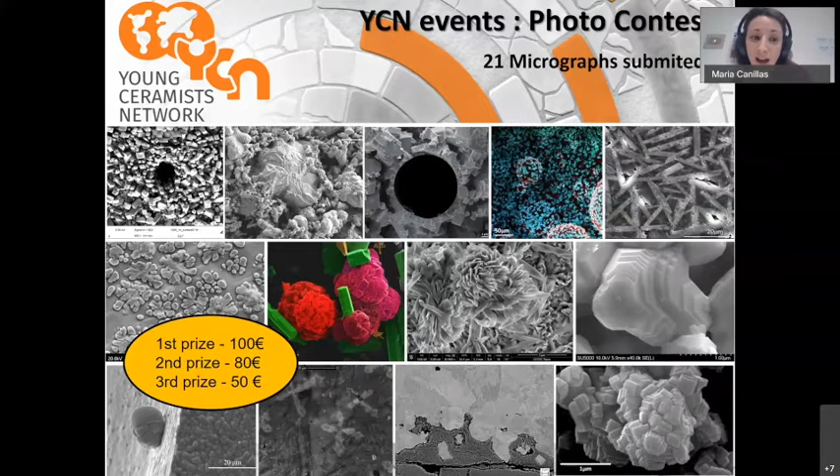Finally, another of the projects we are developing is the third photo contest. The deadline already finished in December. 21 micrographs have been submitted, and we will give a prize to the best micrograph.

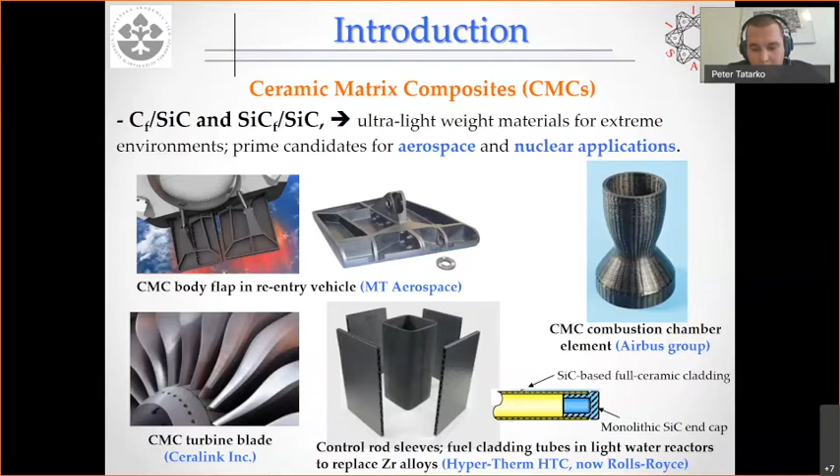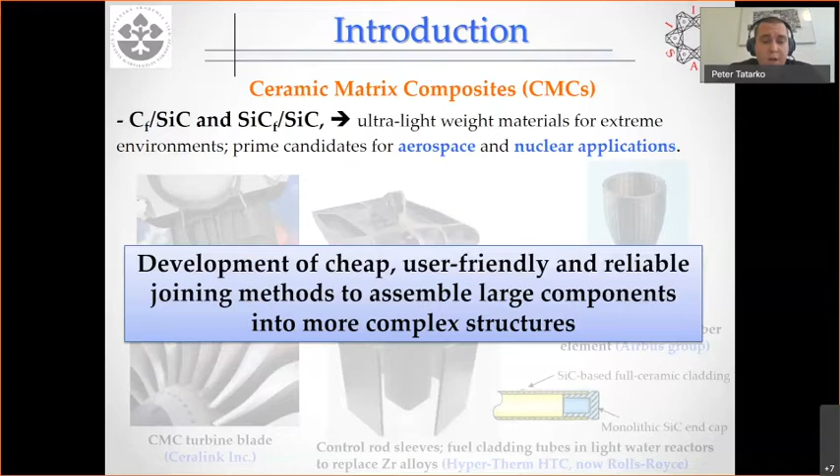But one issue still remains: to develop a cheap, user-friendly and reliable joining technique to combine all these large parts into such complex structures. Me and my co-authors, we tried our best to contribute to this field in the last couple of years.

We were also involved together in one European project called ADMACOM. It was the Factory of the Future project within FP7, and the coordinator of the project was Professor Monica Ferraris from Politecnico di Torino. You can see all the partners here, and I would like to point out that among others, we also had two industrial partners, MT Aerospace and Airbus Group Innovations.

Our aim of the project was to develop new joining technologies for aerospace components. The project defined several different approaches. Here you can see, for example, the brazing of alloys, or using transient liquid phase bonding, also electric current assisted processing. Then the other two were mainly focused on the processing and modification of surfaces before joining.

All these activities were focused on this, because here I'm showing you the same example as on the slide before, as these are great examples from one of our project partners, MT Aerospace. Here you can see the body flap. The idea of the whole project, and why we started working on this important field, was related to this.

This aerospace body flap, you can see here that they were using either mechanical joints, so here you can see several screws, or they were using in situ joining by CVI technique, because these materials were produced by chemical vapor infiltration, and they were using in situ joining technique. Our aim was to come up with some alternatives to suggest new joining techniques for the industrial partner. Apart from that, this is in the board, you can see.

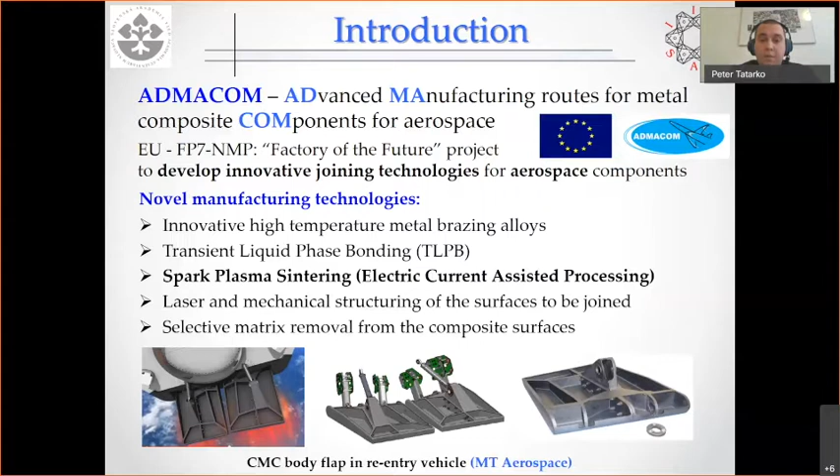My main topic I decided for today's seminar is going to be on spark plasma sintering joining, or if you want, electric current assisted processing. We had to start on this in a small scale, of course.

Here is one example of the materials which was supplied by MT Aerospace. One important feature I would like to point out here: these materials are always covered by CVD silicon carbide layer. So here you can see the top view, this is the backscatter image, and you can see the side. You can see a very uniform light gray phase, which is CVD silicon carbide.

Just to see the difference, here you can see the uncoated materials, and you can see this light gray phase is the silicon carbide from the matrix, but you cannot see such a uniform layer of the CVD silicon carbide. The reason why they were using this material is just because of having better oxidation protection.

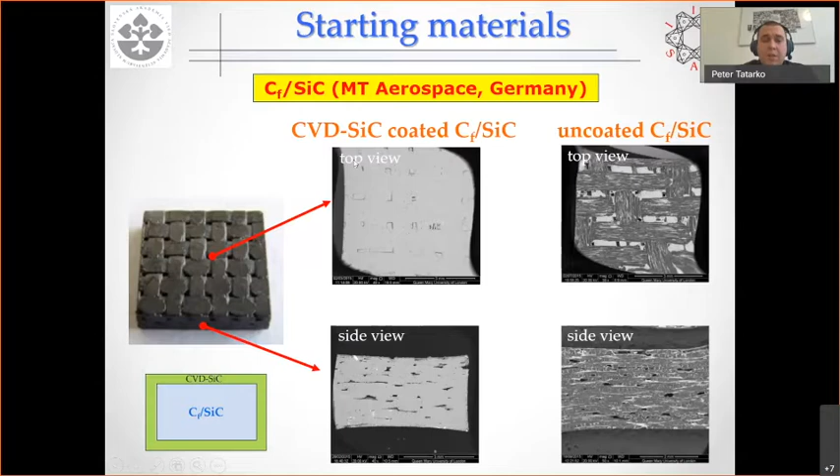Because these materials are always covered by CVD silicon carbide, instead of our aim being to join carbon fiber reinforced silicon carbide directly, we started optimizing our joining process using the monolithic beta silicon carbide produced by CVD, because at the end it's the same interface which comes into contact when you want to make a joint.

There were some requirements we needed to consider before developing a new joining process: we needed to use temperature and time as low as possible. We preferred solid state diffusion bonding. We didn't want to have any liquid phase formation during the joining because we wanted to avoid shrinkage of the filler, to not produce residual stresses in the joint.

And of course, we didn't want any strong reaction between the filler and the matrix, and no decomposition of the filler. These five points were very important for us because at the end we wanted to avoid any damage to fibers or protective coating on CMCs.

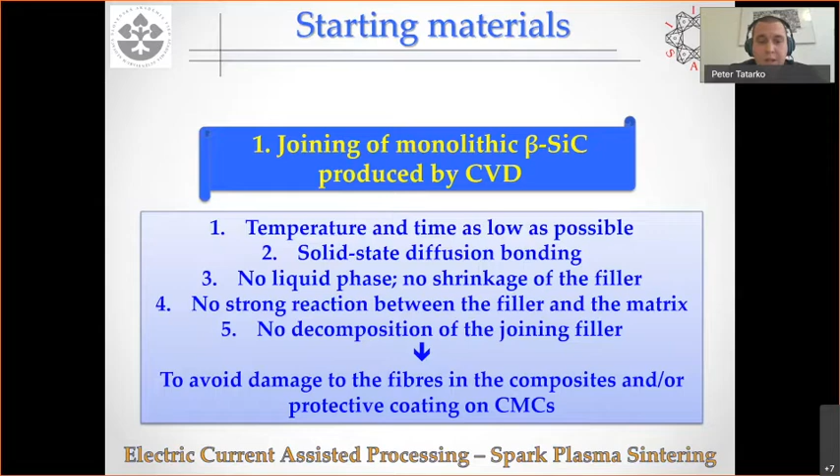And for this process, we use electric current assisted processes, spark plasma sintering. This is my main topic for today's webinar.

So we use a standard SPS spark plasma sintering machine, which you can see here. For those who don't know, this machine works because you have 2 graphite punches, which are connected to electrodes, and they are connected to a pulse DC power supply. In case you have an insulating sample, electric current goes through the graphite die and graphite punch, and then heats up the sample indirectly. In case you have a conductive sample, then you have a combination of both direct heating and indirect heating.

For today's presentation, I will call this process SPS joining. But you can also skip using the graphite die, and then you only use 2 punches, so there's no die, and the current has no other option but to flow through the sample. This sample needs to be conductive, and for this kind of technique I will be calling it flash SPS joining.

So I can say that my presentation today will consist of 2 parts: one on SPS joining, and one on flash SPS joining. So let me start with the first one.

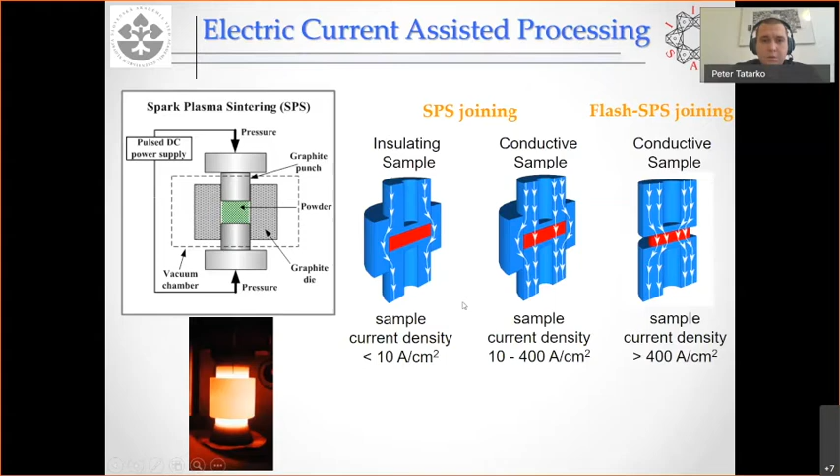Okay, so as I said, it all started with CVD silicon carbide. So basically here you can see what we had. We've got pure CVD silicon carbide material, 2 blocks, and it was quite simple. We put 1 block on another, we put in the graphite dies, and then we put it in the SPS, and we applied temperature and a little bit of pressure, and we got a joint.

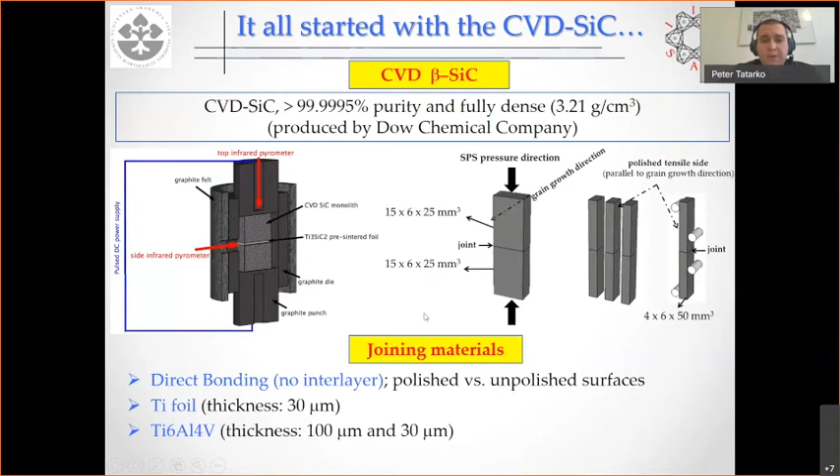As the joining materials, in the first case we call it direct bonding, meaning we didn't use any interlayer. So there was nothing in between. We only compared 2 surfaces, where in one case the surface of CVD silicon carbide was polished, and in the other case it was unpolished. Then we just compared the effect of surface roughness on the joining.

In the other two cases, we used titanium-based foils, pure titanium and titanium-aluminum-vanadium. We inserted this foil in between the two parts of silicon carbide and used it as an interlayer. In the last case, we also used the MAX phase, but it all has some reason which I want to explain and convince you it was a good option to go to.

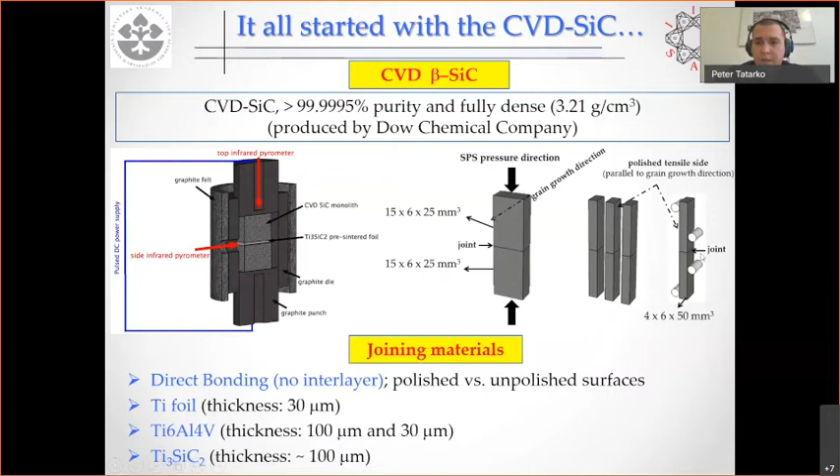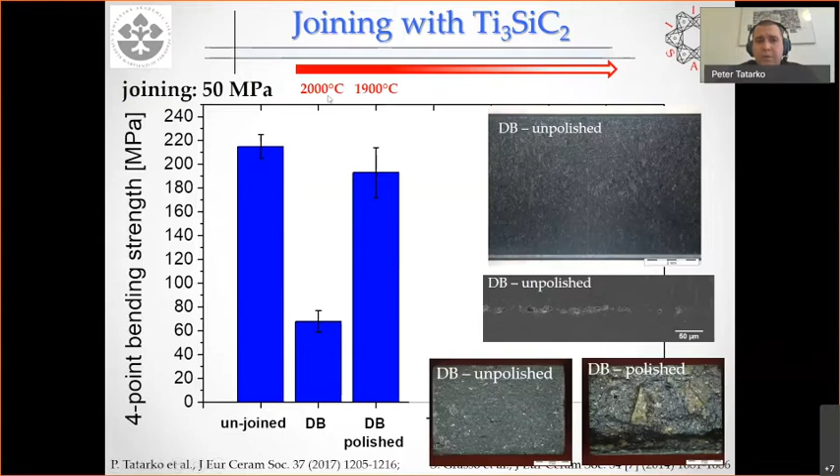So the problem was the temperature. These processes require very, very high temperatures. So we wanted to reduce the temperature, and we used titanium and titanium-aluminum-vanadium foils. We could lower the temperature to 1700 for titanium, or 1650 for titanium-aluminum-vanadium. Especially for the titanium-aluminum-vanadium, we got very nice strength which reached the reference unjoined material.

These results were very positive, and we were very happy about that. Unfortunately, when we looked at the cross sections of these joints, there were two important issues we found.

The first was a significant shrinkage of the filler. Here you can see we used a titanium interlayer with a thickness of 30 micrometers, and we ended up with an interlayer about 15 microns. In this case, aluminum vanadium, we also used 100 micrometers, and especially for the first case you see almost 50% shrinkage. This was very dangerous because it can produce high residual stresses in your material, and that explains a lower strength than in the case of the 30 micrometer foil.

The second important issue I would like to point out is that the alloy was very reactive. You can see these nail-like structures. This can damage either the carbon fibers in the composite or the protective silicon carbide layer. So that's why we needed something else.

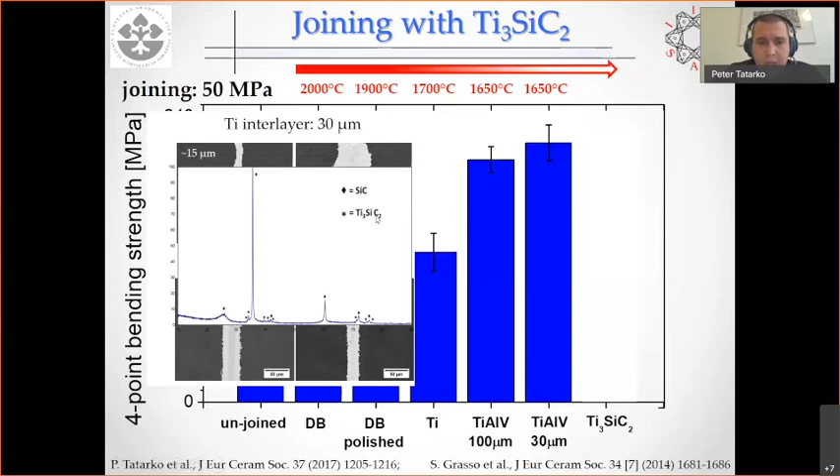One important point: when we did the XRD after the joining, we found, of course, silicon carbide from the matrix, but we also found titanium silicon carbide, the so-called MAX phase. In other words, this joining interlayer was formed by MAX phase titanium silicon carbide. So the question was, why use titanium at 1700 degrees and then end up with a MAX phase, if you can use MAX phase directly as the joining filler? That was our motivation to use MAX phase as the joining filler.

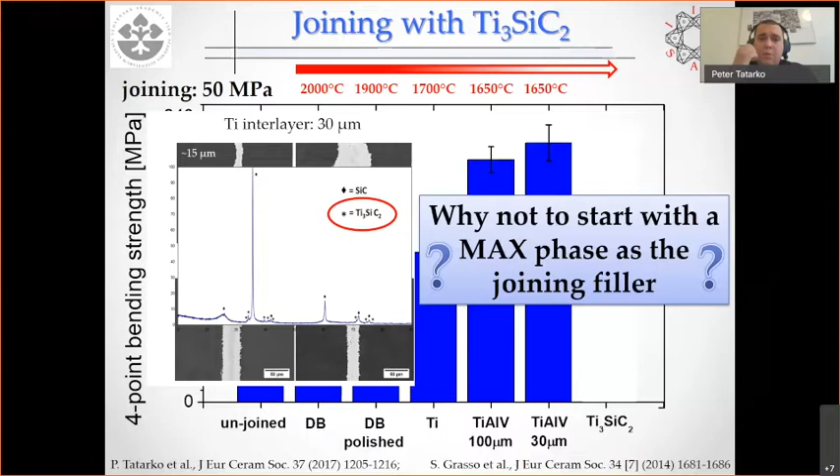So very briefly, we synthesized this MAX phase powder using microwave sintering, and you can see there are very typical impurities for these materials: titanium carbide and titanium silicides. We intentionally added some alumina because alumina helps with sintering of this material and also helps with oxidation protection. This powder was then sintered by SPS at 1300 degrees.

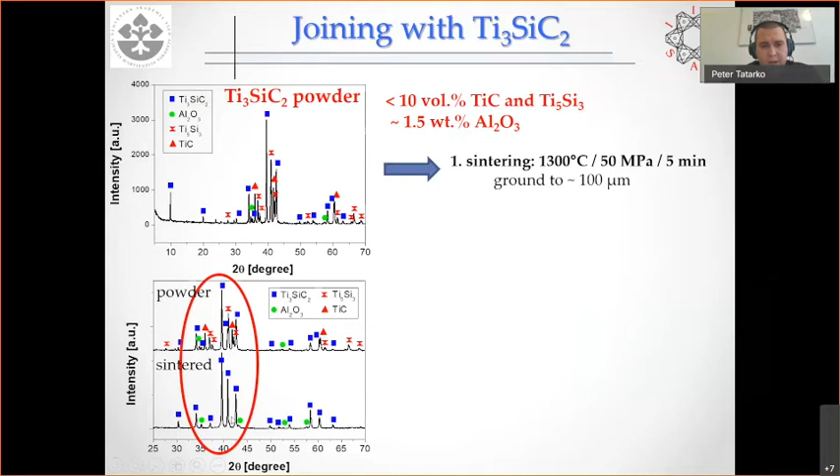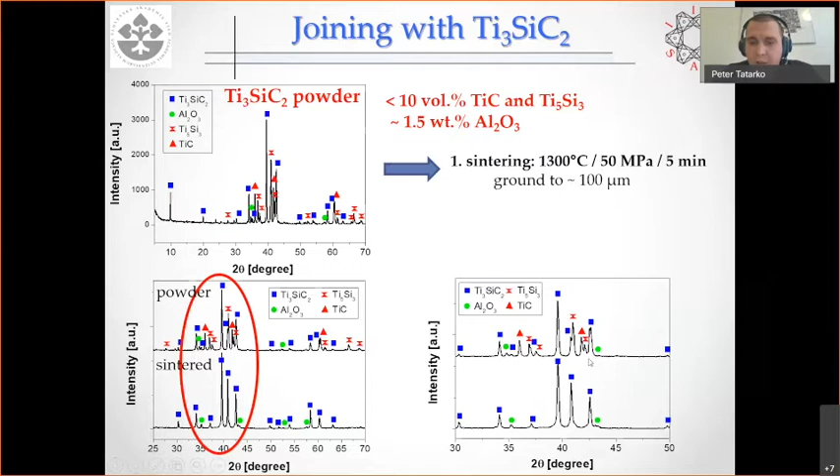What happened was very interesting. You can see here this is the initial powder, and this is after SPS sintering. This graph is a zoomed-in view. After SPS sintering, all these impurity peaks vanished. We didn't see any titanium carbide or titanium silicides anymore.

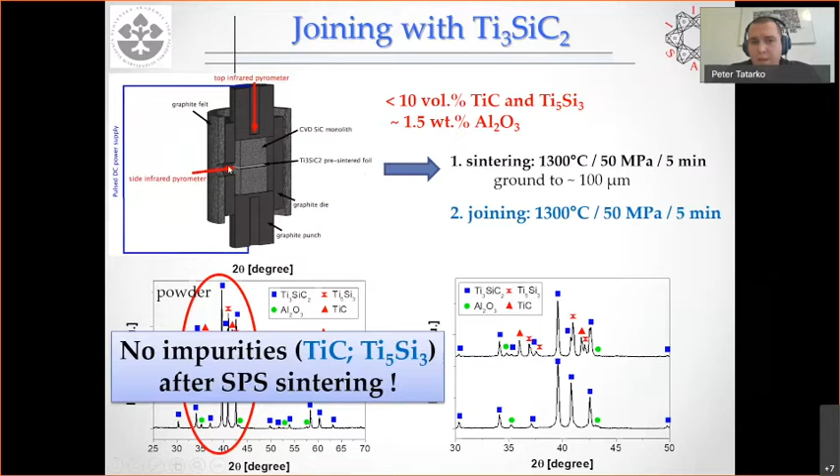This was very important for us because, in other words, for joining we used pure MAX phase, of course with some alumina, but as I explained before, we wanted the alumina to be there. Then we ground this material to around 100 micrometers, and inserted this foil between two silicon carbide pieces, and then used SPS at the same temperature at which we synthesized and sintered this material.

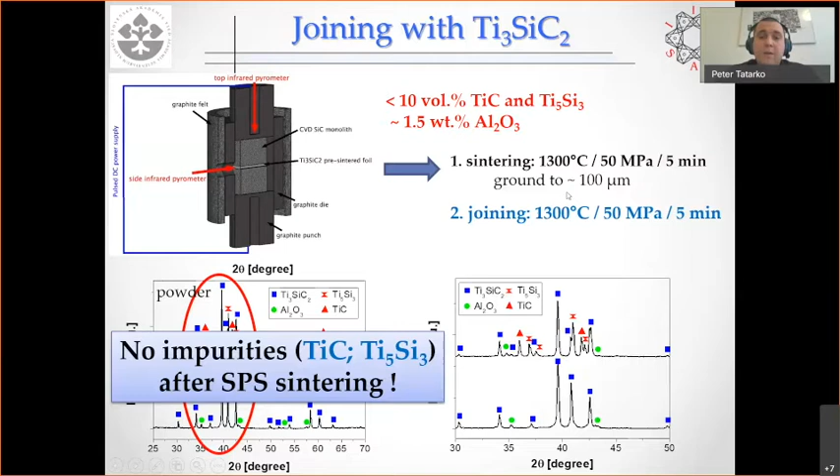First, very clear and very nice results were seen when we looked at the cross section of this joint. You can see in this case we didn't have any shrinkage. None at all. If you remember this nail-like structure, here there is nothing. So the interface was very clear, very smooth, and very nice. We were happy about that.

If we zoomed in, we only found the alumina particles which we wanted to be there, and the remaining material was just the titanium silicon carbide. So from how the joint looked on the inside, the SEM, we were quite happy with that.

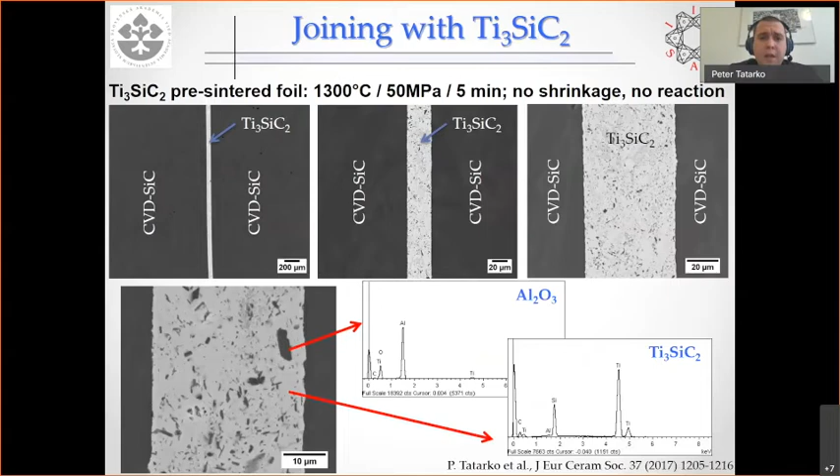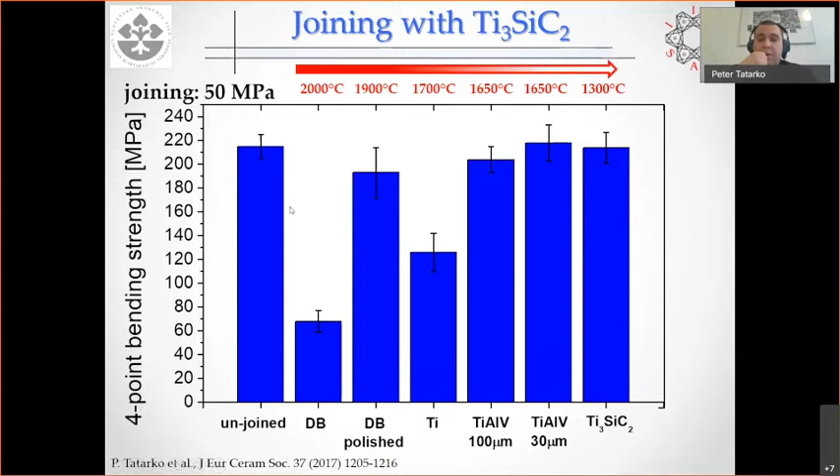Then let's have a look at how the joint mechanically performed. You can see here that with the titanium silicon carbide, we got almost the same strength again as we obtained for unjoined material. The important thing is that we started from 2000 degrees C and lowered the temperature down to 1300 degrees C, which is a significant reduction. In other words, we only used 1300 degrees C, but we retained the same strength of the materials, which is a very important feature.

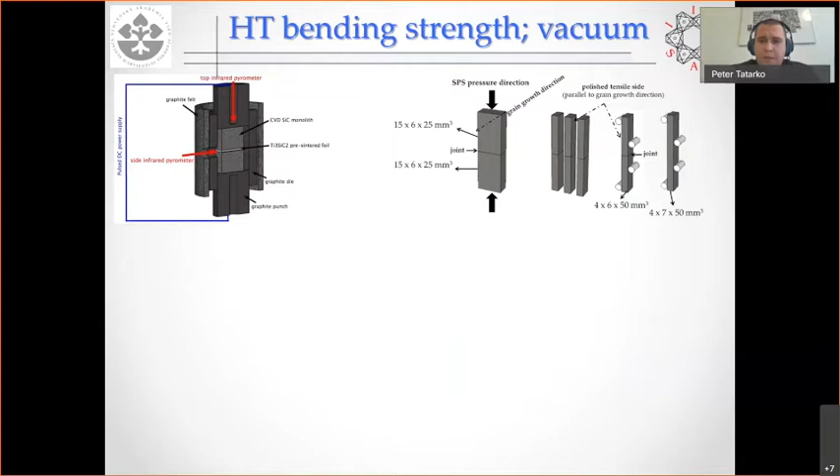That's why we also wanted to see how these joints performed, because as I mentioned at the beginning, these joints were supposed to perform at higher temperature in an extreme environment. So we needed to know how these joints would perform at high temperature. We did the same preparation of the beams, and then used high temperature bending strength testing in vacuum.

This red line shows the reference strength measured at room temperature, and then you see 1000, 1100, 1200, and so on. You can see that at 1000, temperature up to that point had no effect on the strength of the joint. Then the strength continuously and linearly decreased with increasing temperature.

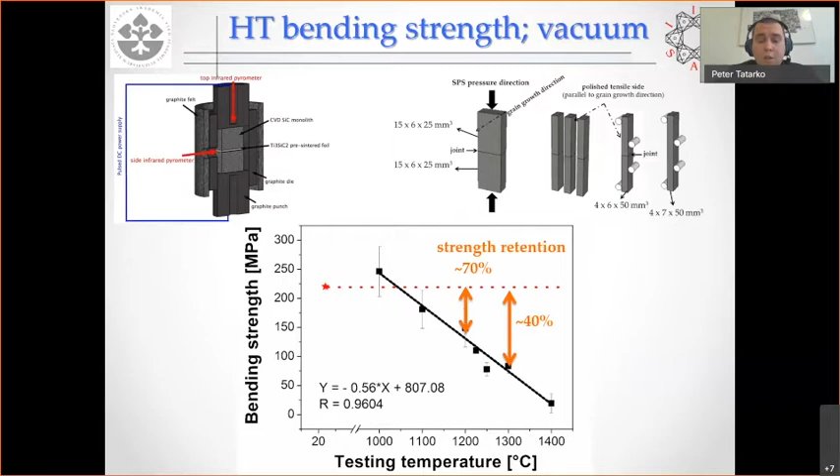The important fact is that from our industrial project partner, MT Aerospace, we knew that the critical temperature for them was 1200. You see that even at 1200, the strength retention was around 70%, which was quite okay. And we still had some room to improve, because even at 1300, it was still around 40% of the strength of the initial joint. So it was quite good results, and we were quite happy with that.

If you look briefly at a few images of fracture surfaces, you can see at room temperature the sample failed outside the joining area. Here you see the joining interlayer. With increasing temperature, here at 1000, 1100, 1400, the interface or the filler played a more important role, and especially at very high temperature, the filler was the weakest part of the joint.

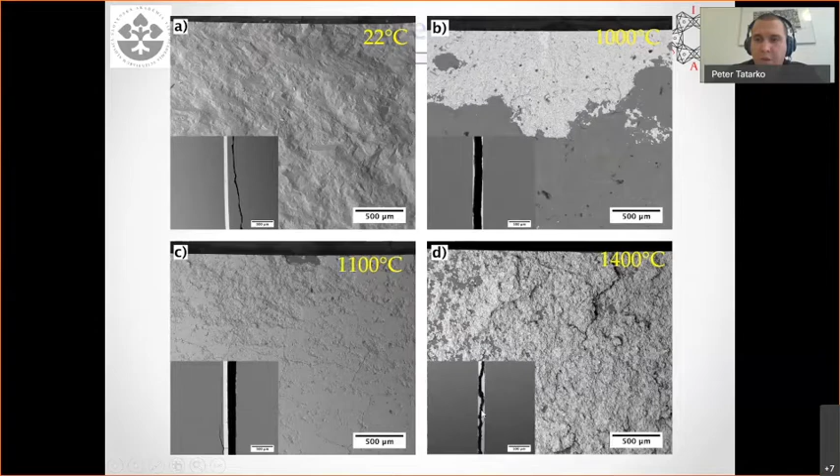A very important fact was that because the tests were done in vacuum, we didn't find any decomposition of the MAX phase, because we didn't see any titanium carbide or silicides or other impurities. At 1400, the pattern looked exactly the same as at the as-joined sample, which was very good. If you look at these images, you can only see typical damage at high temperature, like microcavitation and microcracking. So those were the typical reasons for the sample failing, not the composition of the filler.

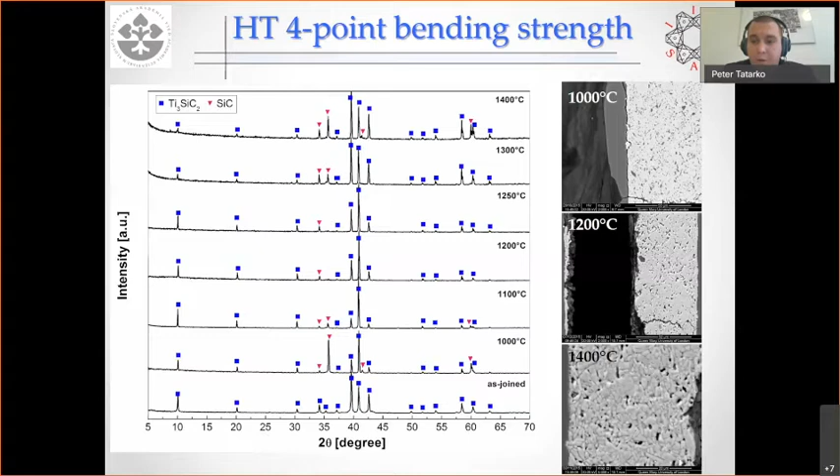So all of this made us believe that this material is promising to be used for carbon fiber reinforced silicon carbide. Now coming to the composite, which was our main priority.

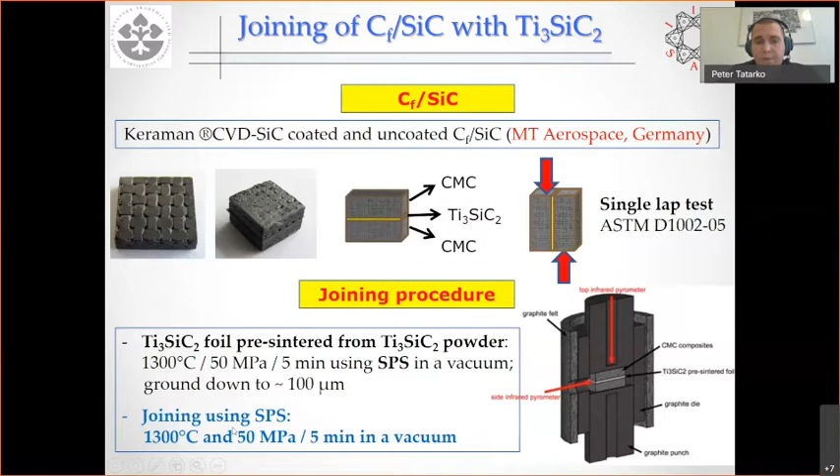Here, as I mentioned, we got some samples from MT Aerospace from Germany, and then we used a very similar process as I described before. In this case, we used carbon fiber reinforced silicon carbide, and used the same temperature and all the same parameters as before.

I would like to remind you that we have two types of material. One was coated, fully coated from all sides by a CVD silicon carbide layer, as I explained before. And here you see the uncoated sample.

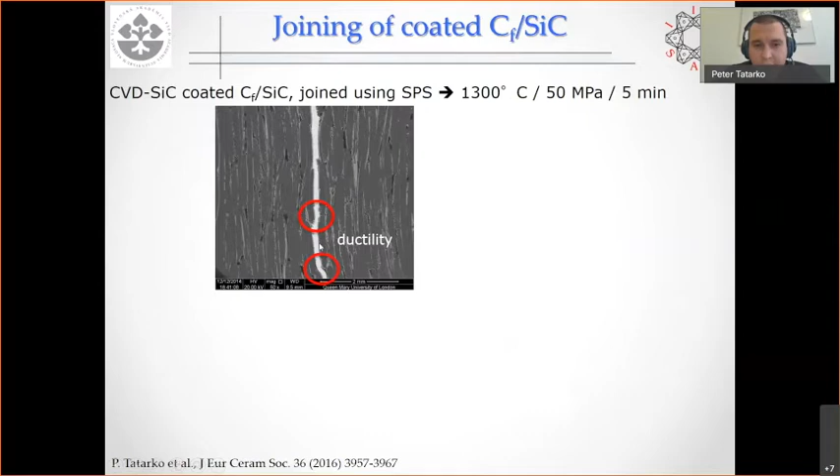So coming to the results, here is the cross section for the coated sample. First thing we noticed was that the foil, the interlayer, was really ductile, because you can see it conformed very well to the rough surface of the CMC. Another important thing: here you see the CVD silicon carbide coating, and this coating always has some cracks because of the thermal mismatch between the coating and the matrix.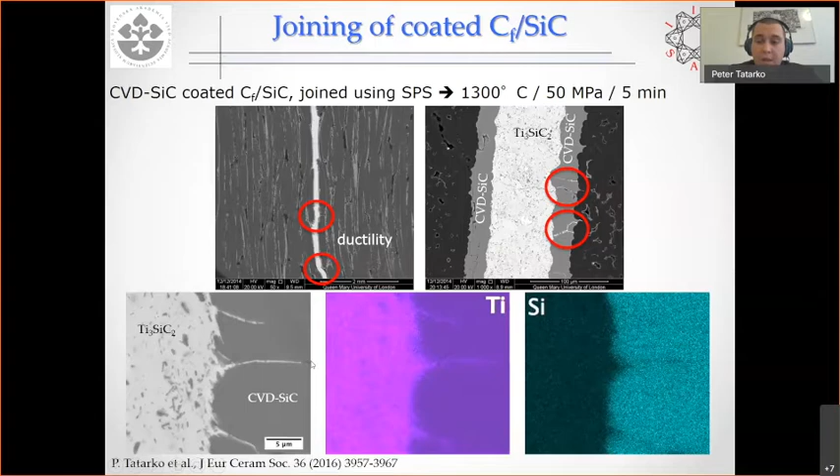In our case, after joining, we actually filled up these cracks with our filler — in other words, we healed these cracks. You can see here the EDX mapping: it's depleted in silicon but enriched in titanium, clearly showing that it's our joining filler that came in and healed the crack. This showed, at the end, a very promising and good result for strength and mechanical performance.

Now coming to the result for uncoated samples. In this case, we have not just one interface, but two interfaces: one between the silicon carbide matrix and our joining filler, and the other between carbon fibers and the joining filler. Especially in the case of the interface between silicon carbide and the filler, it was exactly the same situation as before.

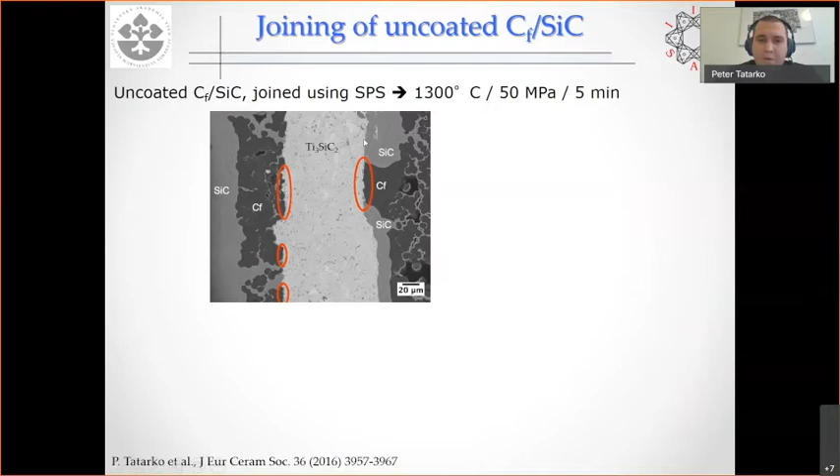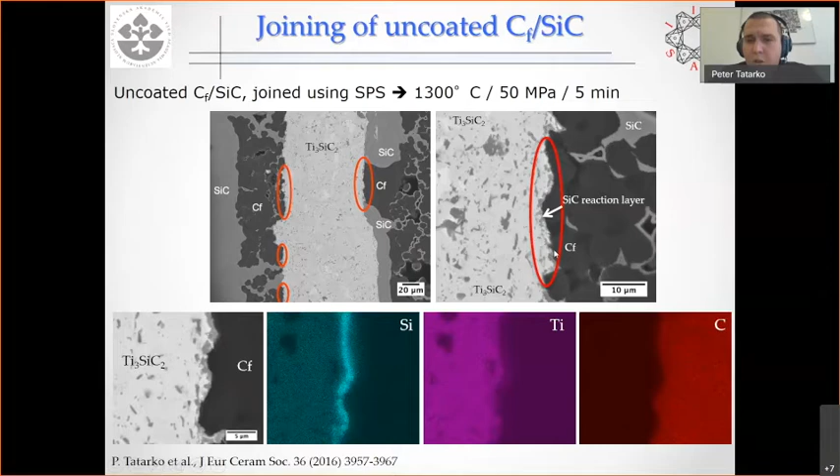But in the case of the carbon fibers, we were of course worried about not damaging them. You can see here in the SEM images and EDX analysis that the filler reacted with carbon from the fibers and actually formed an in-situ silicon carbide reaction layer. Once this layer is formed, it stops further diffusion, so you don't get damage to the carbon fibers.

Coming to the mechanical performance of these joints, here are the values, between 25 and 35 — this was the value we got from the supplier, MT Aerospace, as a reference sample. You can see that when we used coated samples, the strength of the joint — this is apparent shear strength, I should say — for these coated samples, we got strength just within the interval of the reference sample.

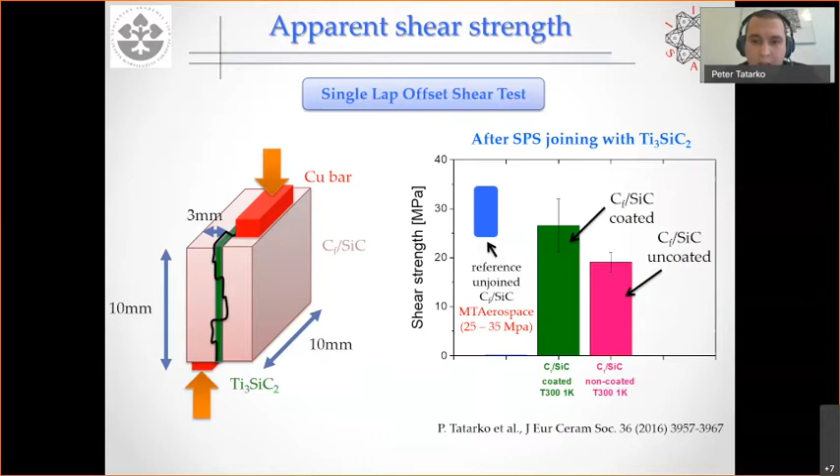In case of uncoated, the strength was a little bit lower, and we believe we got this higher strength in the other case just because this filler was better integrated with the matrix, because it filled up the cracks and healed them. So the filler was better integrated with the matrix.

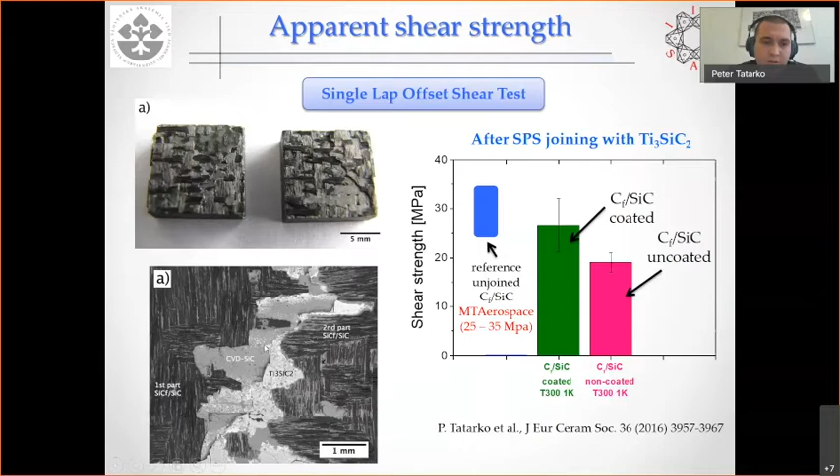If you look at the fracture surface, you can see delamination, but the crack went from one part of the composite into the second one. This suggests that the joint was very strong, stronger than the interlaminar shear strength of the material.

That's why we wanted to go further and understand the effect of electric current on joining performance. So that's the second part of my talk, where I'd like to explain how we developed this. What we did was quite simple - we put the sample, we wrapped the sample.

We wrap up the sample in the graphite felt. Here is our sample, CVD silicon carbide coated carbon fiber reinforced silicon carbide, and we wrap it up within the graphite felt. Then we put it between two graphite punches in the SPS machine. Then we applied a little bit of pressure, and we applied the current.

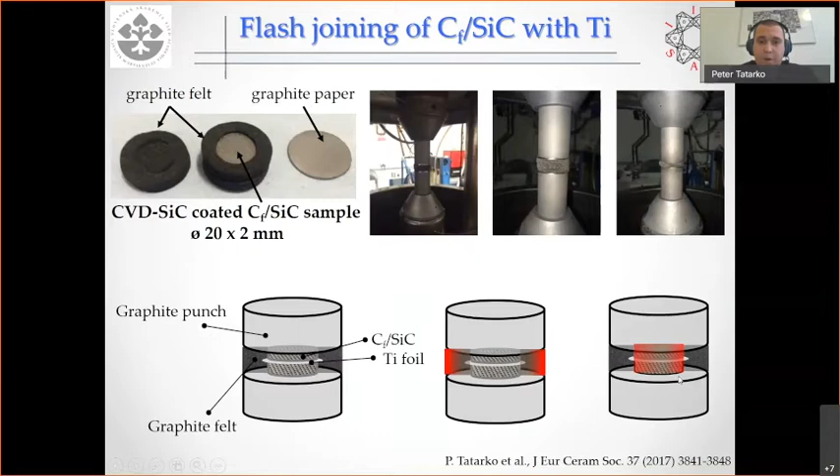So why did we use this felt? We were relying on the fact that at the beginning of the process, graphite felt has lower resistance than our samples. So the graphite felt will heat up first, then preheat our sample, and then the resistance of the sample drops, and the current goes through the sample and we can obtain the joint. That was our hypothesis, that was the idea, and we tried to explore it - I'd like to show you how we did that.

In our SPS machine, we could only control the power by setting the power limit. So what we did was set the power limit to 80%, and we interrupted the process after different times - here 22 seconds, 19 and 12 seconds. Of course, the lower the time, the lower the heating power, and the lower the current.

In all three cases, we obtained joints. After joining, the material could be cut, polished, and looked at by SEM. But the problem was, if you see here - this is for sample number 1, 2, and 3 - you see the power is decreasing. You can see very clearly that the power was so high that we actually decomposed the CVD silicon carbide matrix and the coating - you see all these holes.

Also in this case, it was decomposition of the silicon carbide. In other words, the power was really too high - the temperature inside was extremely high. But we also saw that with decreasing power, here is the lowest power, and you can see the decomposition is less significant than in the other case. So we could see a clear effect of the heating power.

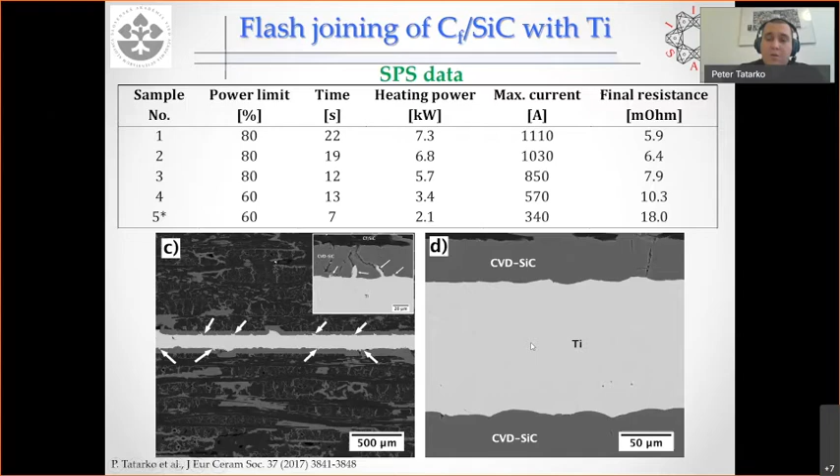So our results showed that it works. You just need to stop or interrupt the process right at the right time. So if you interrupt your process once the resistance drops and reaches the plateau, then it's just the right time to interrupt the process. So it was all fine.

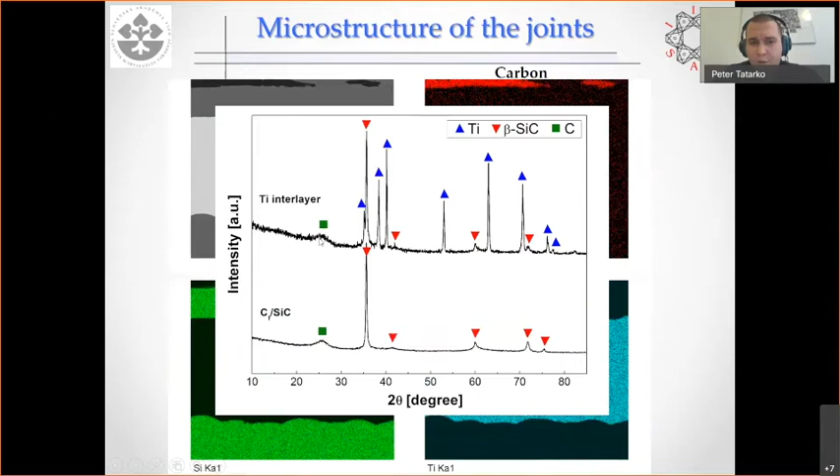We wanted to see what is the chemical composition of the joint, but you can see clearly there is only titanium. You don't see any silicon or carbon diffused into the layer. Truth be said, we also did EDX by TEM, because this is on SEM. We did also by TEM, and we found some very little concentration of silicon and carbon in the titanium, but basically the concentration of these two elements was not really enough to produce some phases, as will happen later, which I'll show you. This was also confirmed by XRD results. You see only titanium, these blue triangles, only titanium we found.

So coming to the most important thing, of course we wanted to understand the temperature, because we knew the power, we knew we got a nice joint, but everyone asked what is the temperature in there. So we inserted the thermocouple just right at the joining interface, you see here, and then we put it in the SPS as before. And you can clearly see here that the temperature, the maximum temperature we measured was below 1250. So it's much lower. The melting point of titanium is around 1670. So this is really below melting point. So the titanium could not melt, and the temperature was so low that it did not allow any diffusion of silicon or carbon into the titanium.

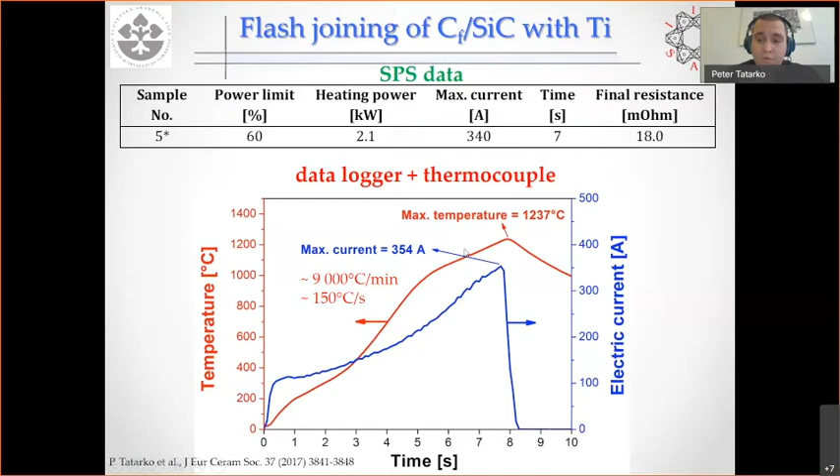You can see extremely high heating rate. It's 9,000 degrees C per minute, or if you want, it's 150 degrees C per second. So it's an extremely fast process, and that's why diffusion of these two elements was delayed or hindered.

Okay, I can skip that. So after joining, of course, after understanding what is the temperature in there, what do you have in the joining area, you always need to know the strength, the mechanical performance of the joint.

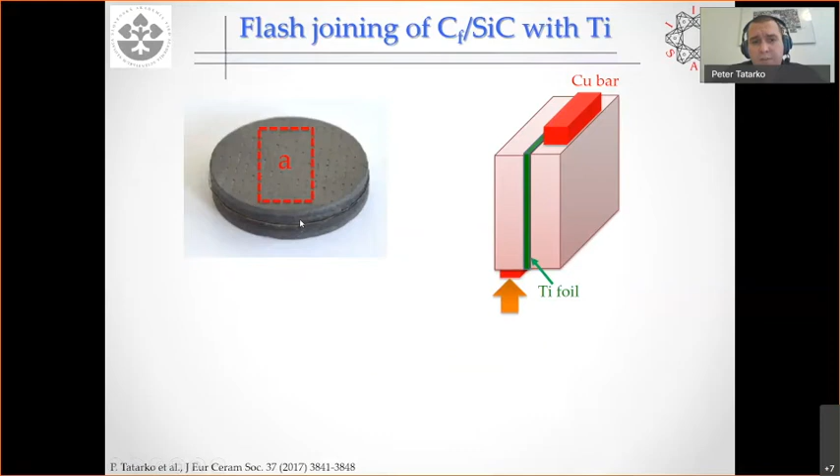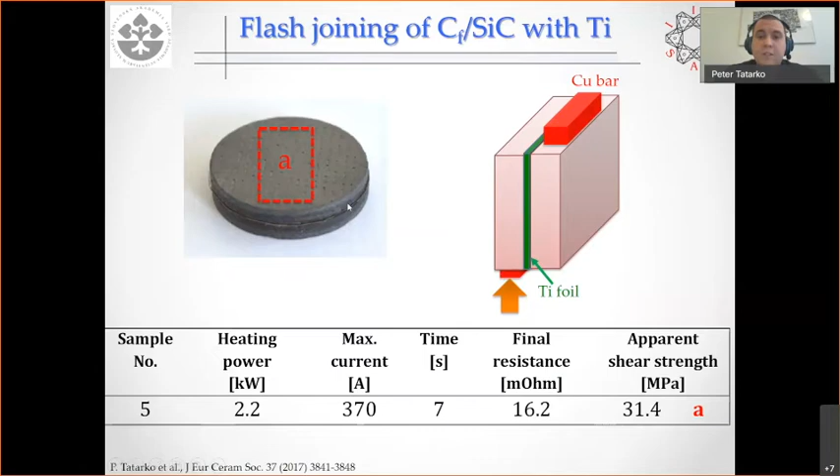So we cut the sample right from the middle of the sample, and here you can see that we got apparent shear strength about 31.4 megapascal, which is an extremely high value, and we reached the value of the reference unjoined material. I will show very soon the comparison with the other process.

Here is just an example of the fracture surfaces. You can see, I would like to point out the conformal behavior of titanium. This layer, which was of course peeled off at some places, but you can see how it nicely conformed to the rough surface of the CMCs. So these are very nice results as well, and that's the reason it conformed very well. It got nice integration with the matrix. That's why we could get such a nice high apparent shear strength.

So as a last part, of course, is the comparison with the standard SPS joining, because here we didn't use the graphite die, we set up a new process, we were playing with the heating power, extremely short period. So we wanted to compare with the standard SPS process. We did the same thing, but this time we used again the graphite die. You can see we used the same temperature as we measured here, about 1250. We used no holding time, as it was for the flash process, and we used also rapid cooling as for the flash process. The only difference was the heating rate, because here it's 100 degrees C a minute, which is standard heating rate for the standard SPS process.

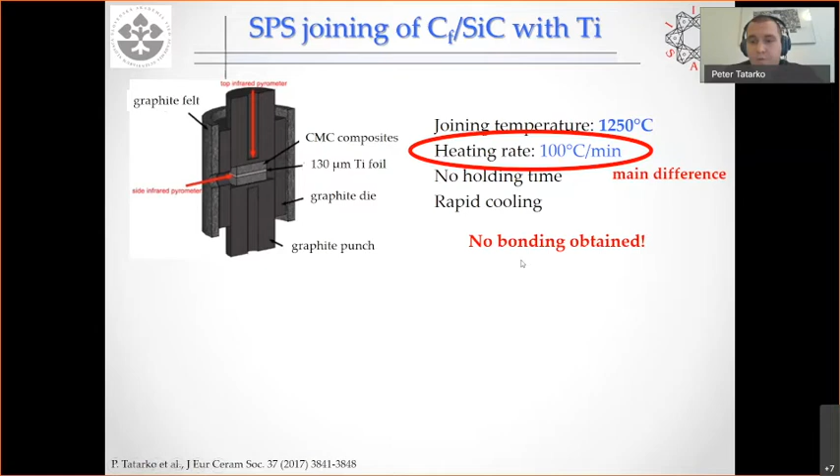If you remember, for flash SPS it was 9,000 degrees C a minute. So significant difference. At the end, when we applied this kind of process, we didn't obtain any joint. This is just the cross section of the delaminated foil. So basically what happened, we tried to join, and after joining the CMCs fell apart, and only we got this delaminated titanium foil.

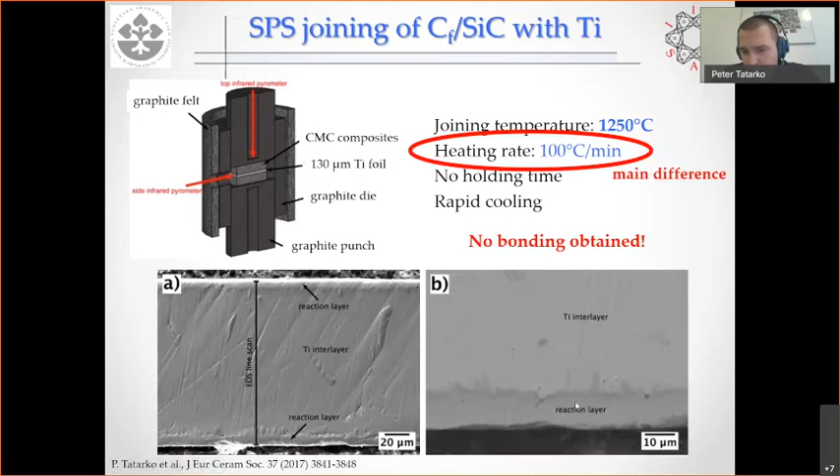But we could still polish it. The polishing is not perfect, but it doesn't matter, it shows what I want to see. What I want to show you is the reaction layer. If we did EDX, you can see this is titanium, and here you see silicon and carbon.

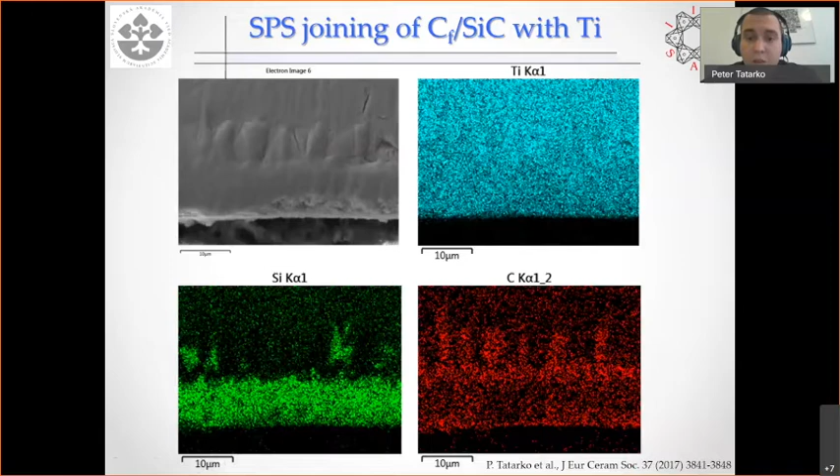So also by XRD and EDX mapping on TM, we confirmed that there was titanium carbide forming, and titanium silicide. If you remember, for the flash joint process, the interface was clear, no diffusion, or let's call it minimal diffusion, not enough to form additional phases.

So if we wanted to get a similar joint using the standard SPS process, we had to increase the temperature to 1700, apply some dwell time, and apply a cooling rate of 100 degrees C a minute. When we modified the standard SPS process, in that case we got a joint, so you see no delamination, and we could test this joint.

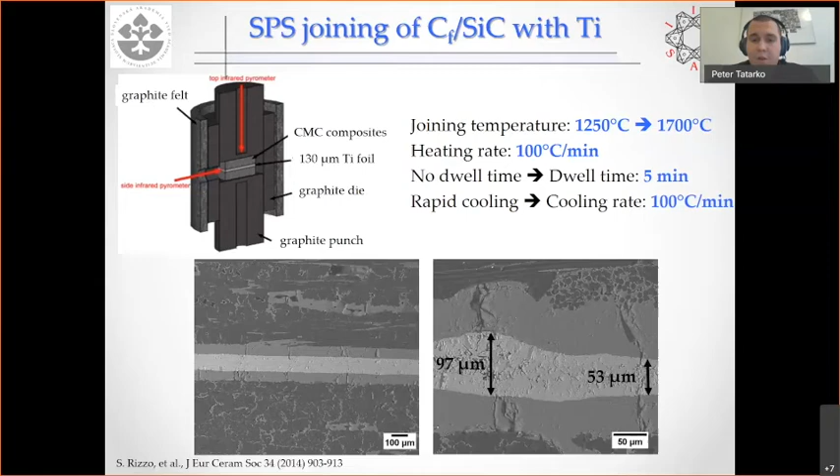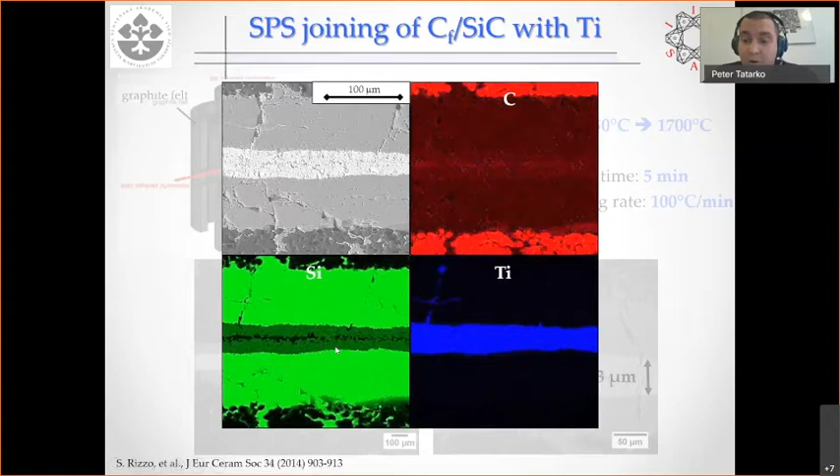But if you look at the EDX mapping, you can see again in the middle part of the joint it's titanium carbide, carbon concentrated right in the middle. Then you see silicon here, so titanium and silicon, so it's titanium silicide. So as I showed before, it's not pure titanium as it was in the case of the flash joining process.

Here is one summary, and you see this is a reference unjoined sample. If you remember, I said during my presentation that the value is between 25 and 35, this is reference from the supplier. But if you use flash joining, only 7 seconds, we got an interlayer, metal-to-metal kind of bonding, and we got titanium within only 7 seconds, and the strength is right in this interval.

On the other hand, when we use standard SPS joining process, it took around 45 minutes, and at the interlayer we got the max phase silicide, and also titanium carbide. So you see the clear difference, and the strength of the joint was much lower.

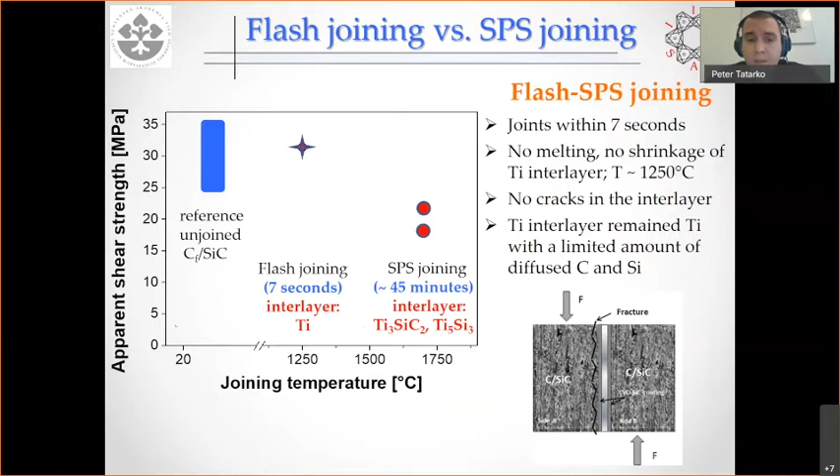So I believe I've convinced you that this flash joining is a very interesting technique, and of course it requires further development, but we are still trying to improve, especially the reliability of the process. So here is just a summary.

I would like just a few points. I would like you to remember that in case of joining monolithic CVD silicon carbide, direct bonding is possible. You don't need to use any metal interlayer, but you need really high temperature and pressure, and also a polished surface.

In case you use titanium, so a metal-based alloy, then you can do it at 1700 or 1650, but you will have significant shrinkage and interaction with the matrix. If you use max phase, in terms of the pre-sintered foil, you have no shrinkage, no reaction, and you can join at a temperature as low as 1300.

In case of the composite, I would like to point out the ductility of the max phase, which can conform very well because the surface of the composite is very rough, so the foil can really conform well, and you get a nice strength. In terms of flash joining, with very rapid heating and the whole process only 7 seconds, you get a very nice joint.

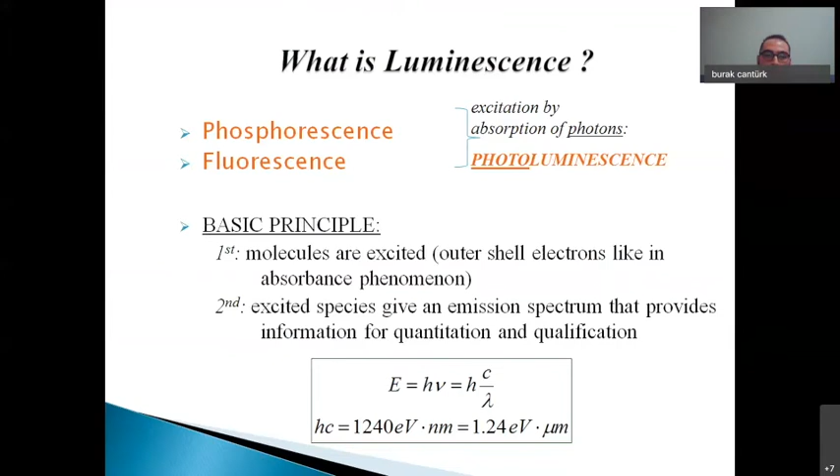Photoluminescence is a process in which a molecule absorbs a photon in the visible region, exciting one of its electrons to a higher electronic state, then radiates a photon when the electron returns to that lower energy state. In order to do that, we need an unfilled electron shell structure, which is why rare earth ions are suitable for this process.

Up conversion is the conversion of low energy photons to high energy emissions. It's the process where two or more low energy, longer wavelength photons are converted into one high energy photon at a shorter wavelength, which is visible in the visible regions.

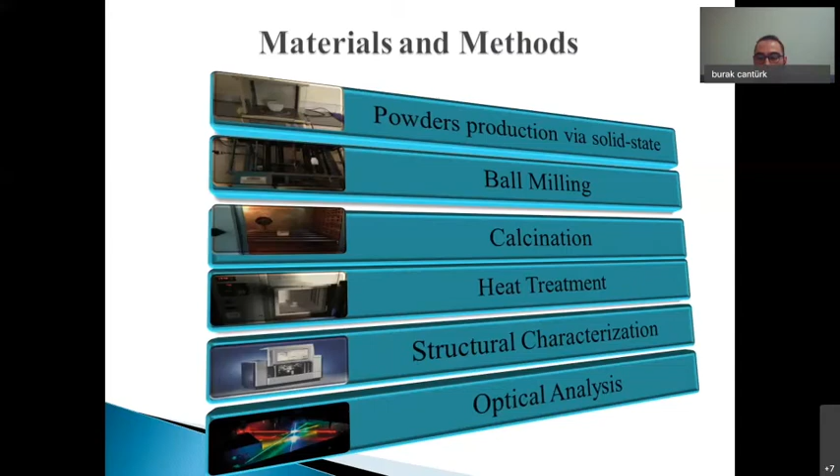Well, after some introduction, let's proceed with the materials and methods section.

We carried out the preparation stage as follows. We used lanthanum and titanium oxide as the starting materials, with rare earth ions such as ytterbium, erbium, and thulium doped with the appropriate stoichiometry in the site of lanthanum. We succeeded in producing this using the conventional basic solid state method.

First, the doped powders were mixed, and then a ball milling process was carried out, followed by calcination at around 200 Celsius and sintering at 1350 Celsius applied to the powders for over 20 hours to get the structure.

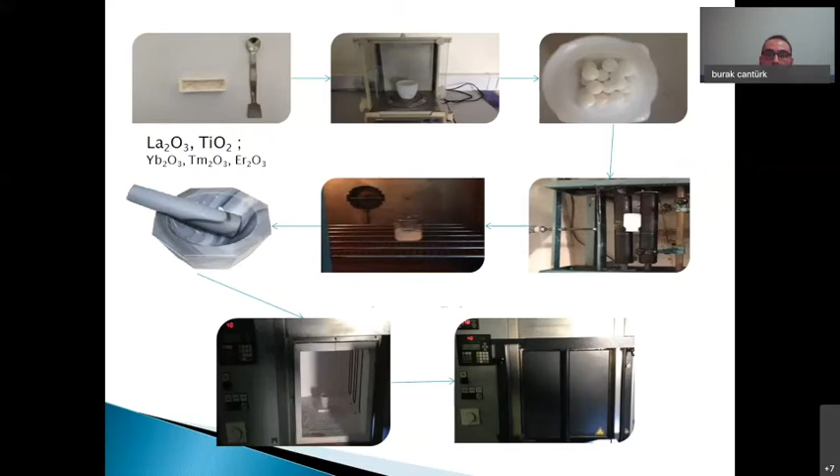Optical measurements of the prepared powders were made after the characterization analysis such as XRD and SEM. So let's take a look at some of our results.

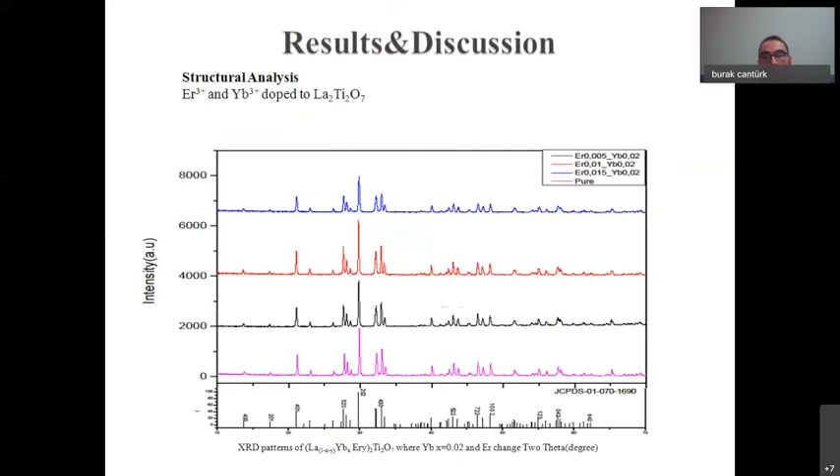In the compound lanthanum titanate, due to the ionic radius being close to each other, ytterbium and erbium co-activate inside the lanthanum site. We also measured undoped phosphors and showed them in the XRD diffraction to compare with the doped substances. As we can see from the graphs, all product samples display a single-phase orthorhombic structure without signs of impurities, with fitting that corresponds well with the reference cards, and no extra peaks were noticed. This points out that the ytterbium and erbium doping does not result in any second phase formation and fully dissolves in the lattice as a substitutional solid solution.

But the most significant observation is that a detailed examination of the peaks reveals slight shifts in the peak position to each side, left and right, with increasing doping concentration. These shifts were noticed during the calculation of lattice parameters and the volume of the unit cell, as we can see from the tables and figures.

In comparison with the undoped sample, co-doped phosphors showed a bigger unit cell volume, since the addition of rare earth ions into the crystal structure leads to an increase in the lattice parameter values as well. But there was no simple pattern between the volume and the doping concentration—the volume did not increase steadily with rising doping rate. In the case of erbium, this leads to slight distortion in the lattice.

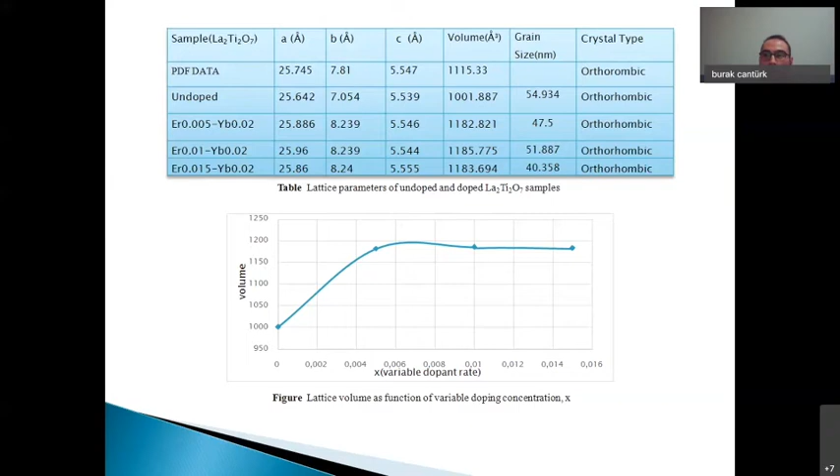Similar cases took place in the tri-doped samples as well. Here we fixed the ytterbium and erbium concentration while the thulium concentration was changing, to show how the thulium concentration affects the optical results. Again, there were some slight shifts between the samples in the lattice parameters, but these results showed that the tri-dopants can also form a solid solution in the lanthanide phosphor.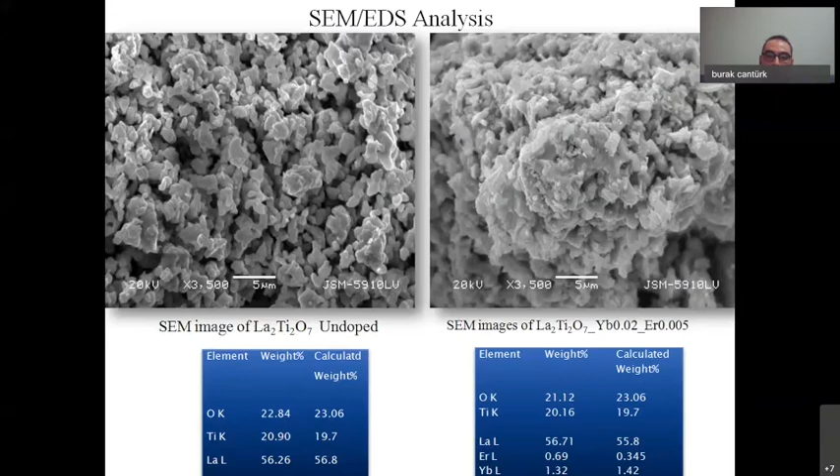Grain sizes were calculated via the Scherrer equation, and the result was, on average, 50 nanometers. You can see from the graphs that there are some spherical but mostly shapeless particle structures observed here. There's also no big difference between the calculated weights and the outcomes, as we can see from the tables, and it can be deduced from some images that there is agglomeration in this structure.

Let's go to the next one. After the characterizational analysis, let's proceed with the optical outputs.

The luminescence analysis of the single-doped, co-doped, and tri-doped phosphors was done in the range of 400 to around 800 nanometers under laser excitation, our excitation source, at a constant power—a single pumping power here.

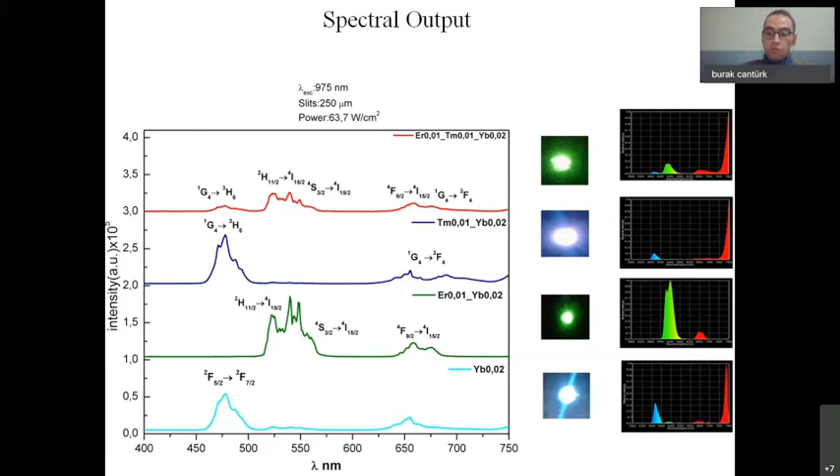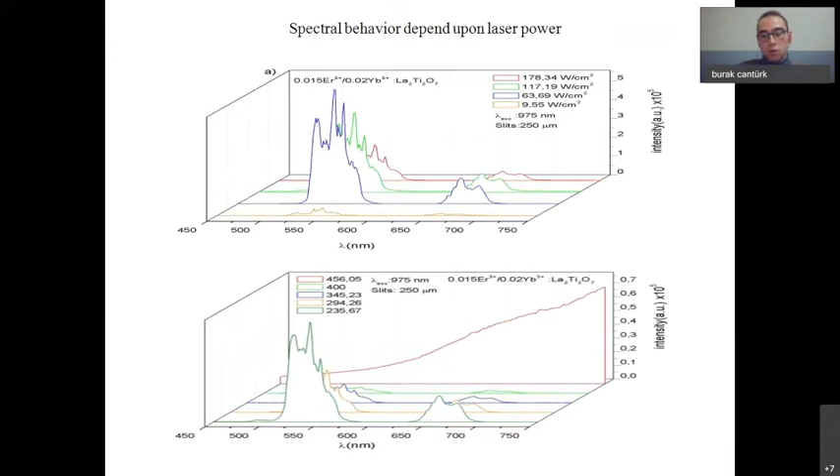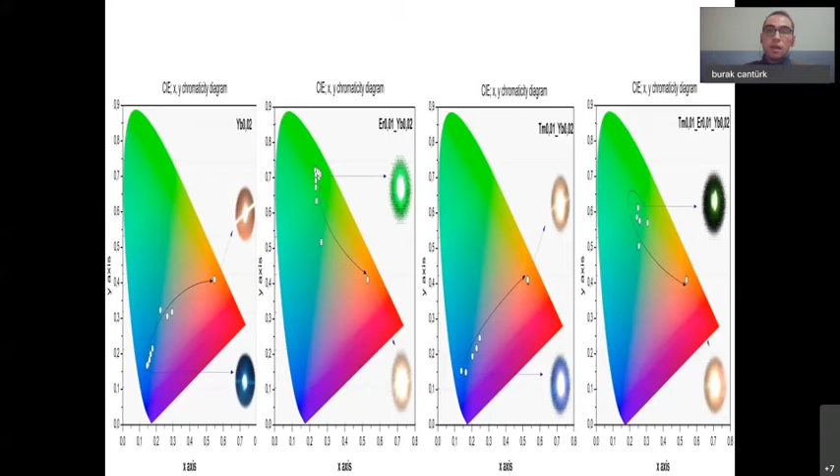As a result, we saw the color changes. The reason behind this is thought to be the energy transfer mechanism between the ions.

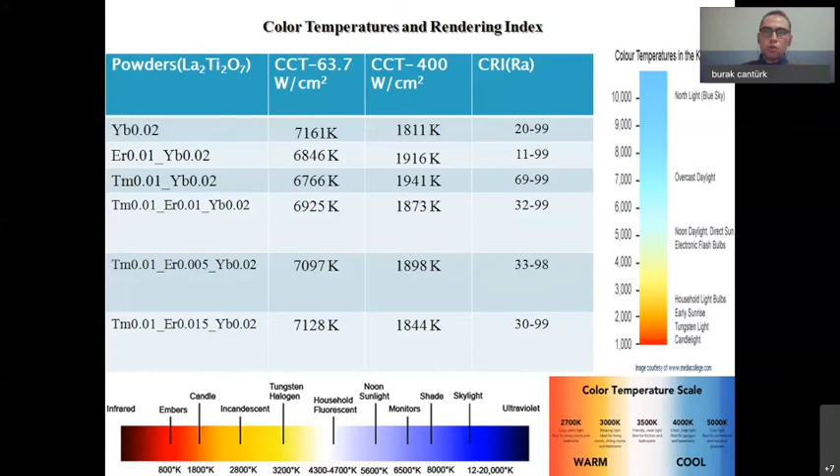But with rising power, it usually reaches white light at about 1900 Kelvin. So warm colors and cold colors, cold lights and warm lights, could also be used in the industry or home environment.

To sum up, as a result of our experiment, the lanthanum titanate structure was orthorhombic, and the XRD investigations indicated that there was no second phase observed in the samples. Also, the grain sizes were calculated as 50 nanometers on average via the Scherrer equation. The SEM micrographs affirmed the arrangement of the single phase in the microstructure. Mostly irregular shapes were observed.

So these phosphors can be used as warm and cold light sources and can serve industrial and home environments. Actually, there are some products in the market right now, but they have a different system - a switch system. They use two different colors, let's say white and blue, and change the colors with a switch. But here, according to our results, we can change the color by changing the power. So it's different from what's in the market right now.

It can also be used in photovoltaic devices, because photovoltaic devices work with upconversion materials due to their ability to absorb light at low energy and convert it to higher energy.